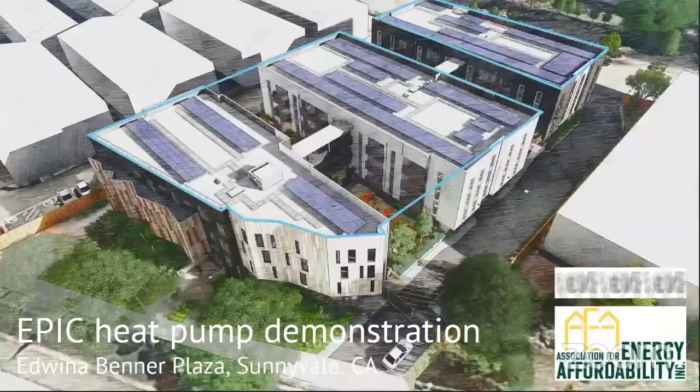This one is a central system. It has a recirculating loop, actually 2—one plant serving the first 2 bars here, and another second plant serving that last bar. So a central system like we typically see, but with Sanden heat pumps operating in series to feed large storage tanks.

We worked with Midpen Housing, who's the owner, and Nick Young at Association for Energy Affordability, who is our energy consultant on the project, and who also linked us into this EPIC project. That's been a really interesting process for us on our end.

Conceptually, the system is not particularly hard to understand, but our sector and industry is one that doesn't readily innovate. For instance, we're working with mechanical designers who, if they're unfamiliar with a system, it really sets off alarm bells for doing literally anything new out of the ordinary. Working with them, and then plumbing subs and sometimes the contractor, can be another obstacle.

This particular design went through a couple of iterations as we were going through design—that's just one function of being part of the pilot. But also going into operations, making sure the system is going online well and functioning properly is something the research team is really in charge of. Seeing that roll out and take place is interesting when we're also trying to use this project to look ahead and see how we can grow our advocacy to install similar systems and start pricing them out earlier on in projects.

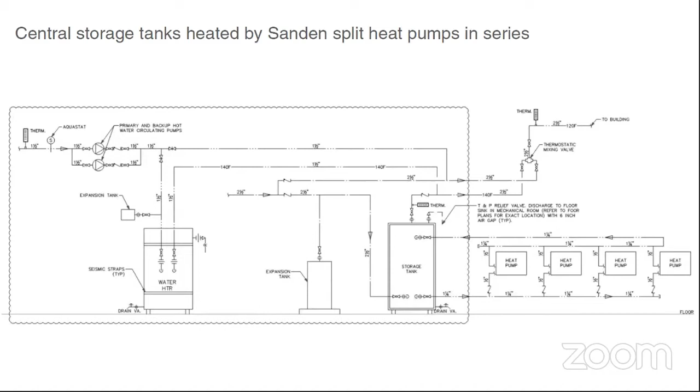And so, I wanted to highlight this next slide because obviously the grant money was pretty critical, I think, in making sure this design happened through design and construction phases. And it's something for us to keep in mind if we were to do this in the future. But also it's being driven by the research agenda.

And so when it comes to how this project lands with the owner, how it informs their perception of heat pump hot water systems, how they understand how it compares to the typical gas and solar thermal, we're kind of the ones stepping in to fill the gaps and talking to AEA. We had a debrief and decided as a team how we could develop some tools to help both us and the owner make sense of this system. So that was really interesting.

I think a big piece of that is a systems operations narrative and diagram that works for us, but also is a little bit more of an intentional handoff to the operating team on site. Because once the researchers pack up their bags in about a year and report on the results, this system is going to be in the hands of the owner, and we want them to feel good about that.

The other opportunity with this project that's really interesting is that we completed a very similar, almost identical project just a mile away with the exact same team, same consultant, same contractor, same owner. And so we're hoping to work with the owner to do a modest performance comparison there so that that can inform their design standards, hopefully. Next slide.

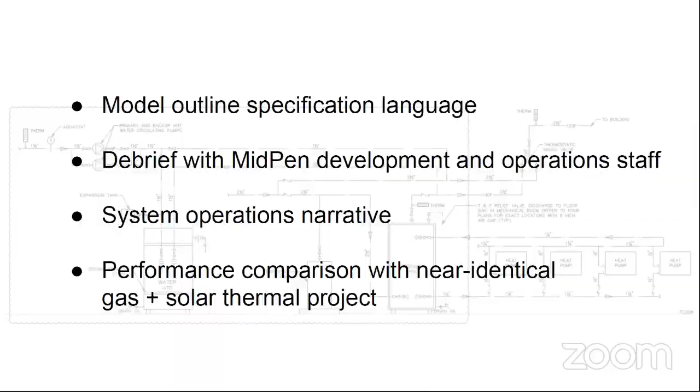So that was sort of our first experience with electrification. And now what I wanted to spend most of the time talking about was Coliseum Place, which is a project we're working on with Sean. It's in Oakland, California. Go to the next slide. It is 58 family apartments, very low income, the heart of East Oakland near the Oakland Coliseum. 20% designated for current homeless, formerly homeless, we refer to them, and 25% also people with mobility impairments.

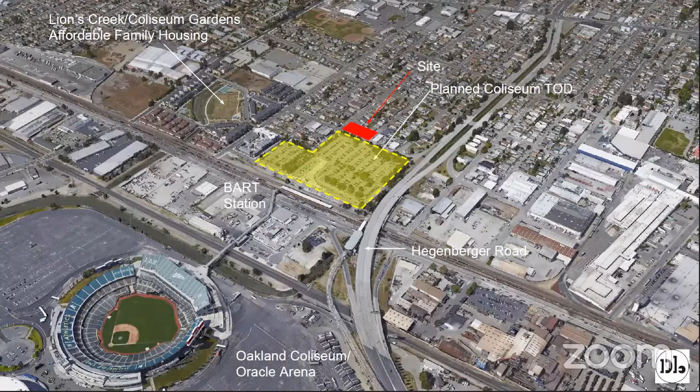So, next slide, you can see it in its context. Sorry, go to the next slide, thanks. So it's in this kind of neighborhood with a lot of need, both for affordable housing and for increased density. And as a result, the owner came to us, so sorry, let me explain a little bit. It's situated not in the planned transit-oriented development next to Oakland BART station, but just adjacent to it at a formerly industrial site, which itself is just adjacent to this neighborhood that's very low-rise, single-family working class homes. Next slide. I forget what the next slide is.

So the client came to us actually with this interest in doing something beyond LEED. They wanted to advocate for something better. This was like 4 years ago. Doing zero net energy for a building this scale still seemed really out of reach. And the International Living Future Institute was launching a pilot program to look at how the Living Building Challenge might apply to affordable housing projects like this. And so we jumped on board in that pilot program, and that opened the door to have a different conversation about this building than we would on another project.

So a couple of things about it, just in terms of the design, is it's a pretty simple mass, double-loaded corridor. It steps back from the single-family neighborhood to the northeast. And typically on our projects we usually like to create a welcoming entry and a nice green open stair. We call them a green stair. I don't actually know why. We like to put greenery in them, maybe.

Open circulation. In this particular project, we had an opportunity, just due to the site dimensions, to maintain that slot all the way through. And opposite the stair is laundry, so common area, really accessible and celebrated bike storage that hopefully actually gets used rather than sticking the bike rooms in the garage. It also links green space, common open space, and the ground floor common areas. So we see this as a central active core, a social environmental core.

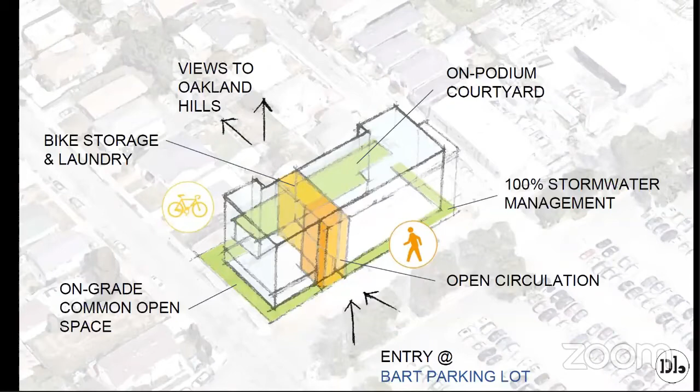From the site response diagram, it also has a challenging southwest primary orientation, which seems to be pretty typical for us. We always have this orientation. It's tough to deal with. So from early on, we conceived of an exterior sunscreen that was integrated with balconies that have since gotten removed, but the screen has survived. And we're doing this living building, so we're looking at this elevated PV canopy.

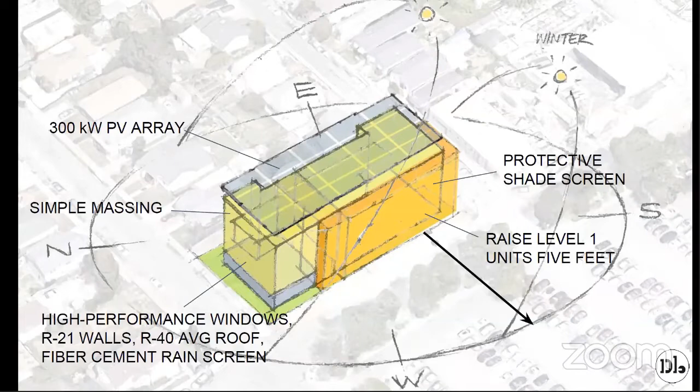In terms of the envelope, it's actually pretty standard. We're not bending over backwards to do anything. We are just on the better performance end of things. We are using vinyl windows, R21 walls, and then we do tapered rigid insulation, mineral wool insulation. The Rockwool roofing product is tapered to provide the sloping, so it provides a pretty high average R value. And then our typical fiber cement rain screen. Next slide.

So early on, I'm gonna check the time here. This was almost 4 years ago when this project kicked off, when they applied for funding in the first round and it was denied. But we were still a part of this LBC pilot project. So we did an early stage design energy model, with a little bit of a grant from Enterprise Foundation, to look at the feasibility of the energy petal, which is net positive, actually 105%, and the water petal. So this was kind of a side project.

Doing this kind of design energy modeling is not something we typically can afford. Title 24 compliance software has been the primary tool we use to make energy decisions, which is awful. Actually, I guess it's getting better now. Until recently it has been pretty inappropriate, and it's hard to justify using analysis tools outside of that, especially for affordable housing, or really anyone. No one sees a reason to optimize for operating energy or comfort or anything you might use a whole building benchmark model for. So this was a good opportunity to finally do that for one of our buildings.

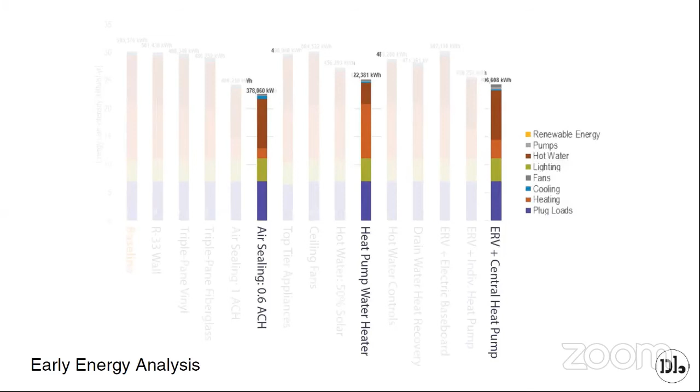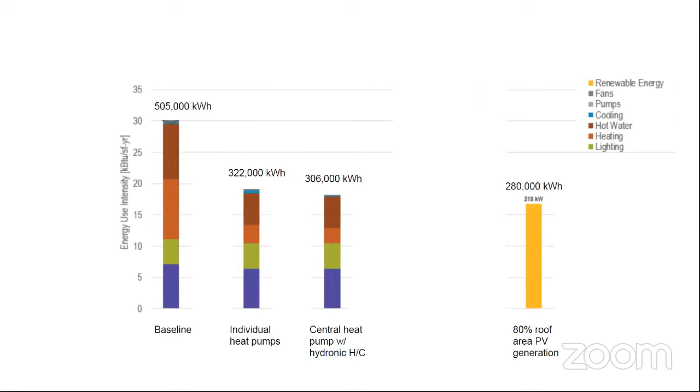That, what technologies for heating and cooling, probably isn't the biggest, didn't show the biggest difference. And that was clearly going to break the bank, so we didn't consider that. But this early analysis, this is just sort of how this analysis showed us going from a baseline building to one that almost got to the PV that the building could support. Next, please.

So when we actually kicked off this project for real, when it got its money, it got its feet under it this last fall, that analysis sort of started us with this base system, which is ductless mini splits in the apartments and individual HRVs in every apartment. And this is actually a pretty standard base system that we propose in our projects now.

We've started using HRVs more in place of bath fans. There is some cost recovery there, so you're sort of switching out one piece of equipment for another. And then mini splits do tend to be more economical versus a ducted split system. But it's still a lot of little bits of equipment, and probably the primary downside, other than installation costs and maintenance of tracking all these little pieces of equipment, is the maintenance schedule for filter replacements on the HRV. And this is a challenge, I guess.

I wanted to run through 3 different scenarios that we considered for this project after Sean and our MEP came on board, because I think it illustrates some of the unresolved issues in the continuing debate that we need to still be having about proper ventilation for these apartments. Next slide.

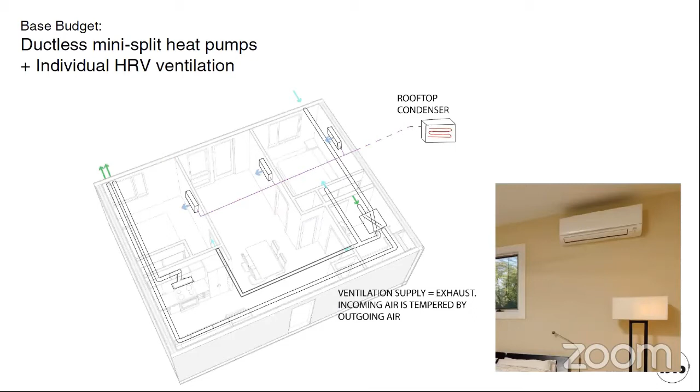So if we were to cut out some of that upfront equipment, labor, and maintenance cost, we might go to a simpler package system. In this case, a VTAC that also offered some ducted distribution, and infiltration to provide makeup air, because there is some research to show that the exterior wall acts as a decent filter, and there will be some that comes under the door to the corridor.

We know that is a big issue, just by looking back at projects and seeing concerns about odors and drafts coming under the front door. That's kind of the chief downside, is you don't know where the air is coming from. But otherwise, it's a very simple, legible, easy to understand, and probably decently performing way to go. Next.

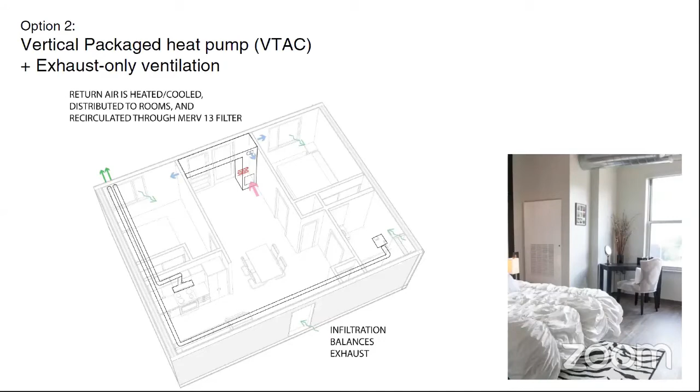We also considered a central approach to air delivery. Our mechanical engineer referred to this as sort of a hybrid approach, where you're not delivering minimum outside air, you're upsizing the ductwork a little bit so that a central heat pump does cover some of the heating loads, and the volume of air, even the cooling side, could be used for some sort of free cooling, kind of like an economizer idea for a multifamily building.

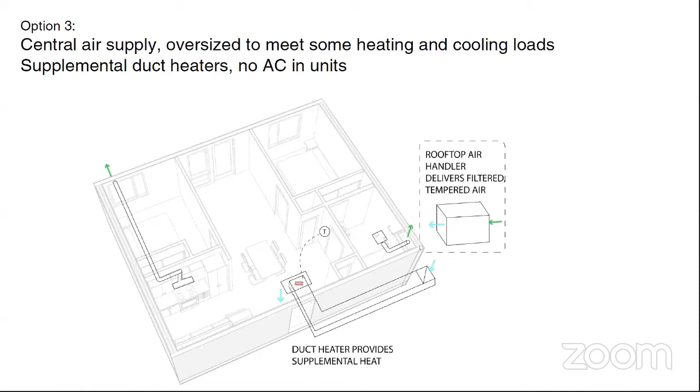But not with the complex zoning, right? So each apartment would have control over a duct heater and no air conditioning. Next slide. So between the time when we set out these three options, and I should say that last one, the whole idea was you would save on the cost of installing heating and cooling equipment in every unit, and no air conditioning in particular.

So, as a side note, that didn't end up being a controversy for this project. Oftentimes we have a really hard time advocating for air conditioning. But in this case, we didn't. Everyone was in agreement that heat waves are real and we need to provide air conditioning in Oakland. But it's just interesting to highlight that that really is not typically the case.

So as I was saying, between the time when we selected those systems for comparison and the time we actually sat down and decided, this happened. The Camp Fire sent us elevated levels of particulates, very hazardous air. I don't think it dipped below an index of 180 for the entire 11 days. We have a particulate counter in my house, so I was tracking it and refreshing PurpleAir 5 times a day.

It really changed my thinking, and I think the thinking of folks on the client's team too. I was considering my 1-year-old and all the other 1-year-olds with their families told to stay indoors, and knowing that indoors is not that much better than outdoors when you have that level of hazard. Next.

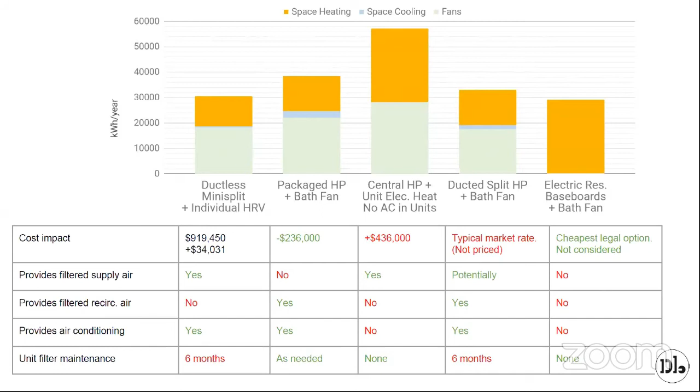Moving right along. So we ended up leaning more towards this. The package unit started looking pretty good, with the only downside being that it doesn't provide filtered supply air. Next. And so with the VTAC, actually, it takes up like 9 square feet of an already very small living room. And so we're actually moving forward with a smaller PTAC.

So, you know, there are definitely downsides to all of the options, but in this case, we're really focusing on the theory, the hypothesis, right, that if you're focusing on simple legible systems, cost, affordability, and maintenance, then energy, your goals start to align. Next.

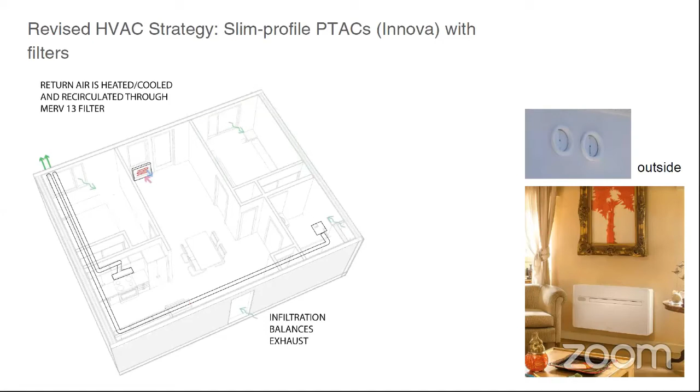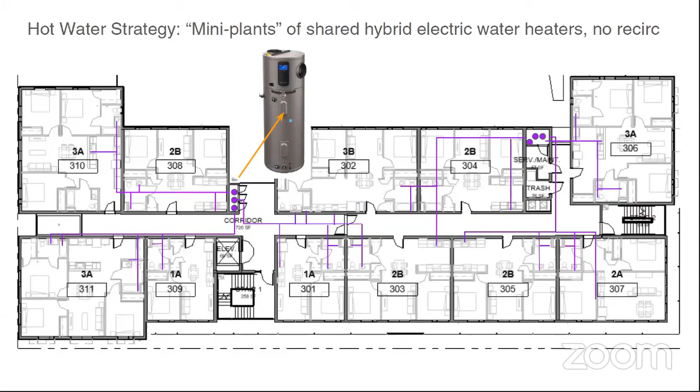And we're pursuing a similar kind of hypothesis with hot water. And this is pretty interesting. This will be the first time we don't do a recirculating system in probably 25 years. The last building, at least I know of, had individual tank type water heaters in each apartment. In this case, Sean at RCD is working on a project that also does this model of sharing these single family style water heaters. In this case, we're trying to bank them into mini plants that serve groups of units across the building. Next. And the thought is that they're probably lowest cost and highest efficiency at the same time.

Yes, yeah. And it's supposed to be a zero net energy building, so they're pursuing the most efficient and cost-effective strategy, hopefully. Sorry, that's just my editorial. No, please, yeah. And we were kind of like, oh, where are they going to go? And then we got excited about showcasing them even in this central slot that I was talking about earlier. Next.

So we've been going through a process with our plumbing designer of seeing how this would work. A first take, a trunk and branch serving from each water heater to the units it's serving, generated a 2-minute wait time at the furthest lavatory because the upstream branches needed to upsize pretty dramatically. Next.

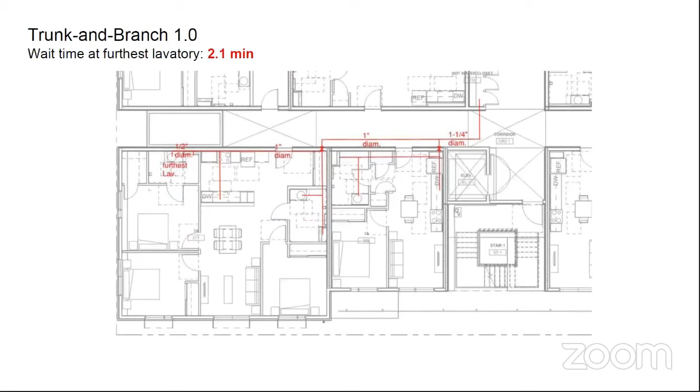And so we're still in the shredding phase. So we're working with Sean and our plumbing designer to pursue different options. One is maybe grouping fixtures more and working more with a manifold to downsize those upstream pipes, which has already gotten us down to 1 minute. And then our plumbing designer on this project, bless her, is actually pretty open to doing more detailed pipe sizing calculations to get those pipe sizes down even more. Next.

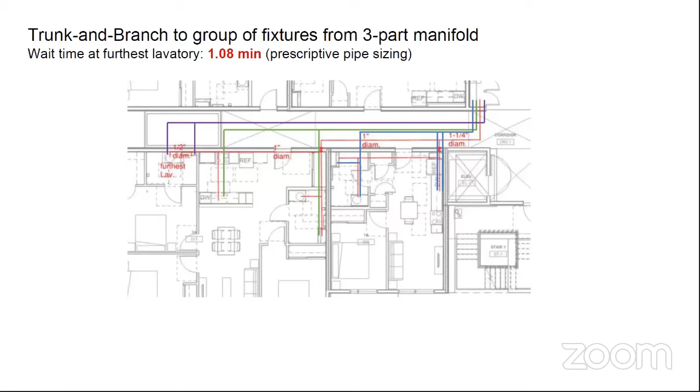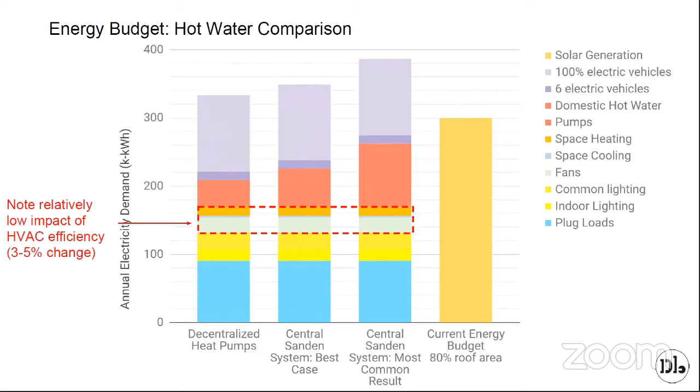And just to kind of highlight, you could see, even though we didn't choose the most efficient HVAC system, it doesn't amount to more than like a 3 to 5% change in the overall total. Next.

In terms of those design decisions that we made, they're kind of highlighted in yellow here, and they are represented by quite a significant savings if you also include deleting gas service to the building, which in this case, honestly, we haven't seen that much money from doing this on this and the Edwina Benner project, but it is something.

And then in addition to that, a 2015 utility allowance calculation suggested that we might recover over $500,000 from the owner being able to claim zero energy bills from their residents. So that's actually pretty amazing when you compare those sums of money to the big investments that this project would be making to go to zero, which is namely the exuberant PV structure on the roof. Next slide.

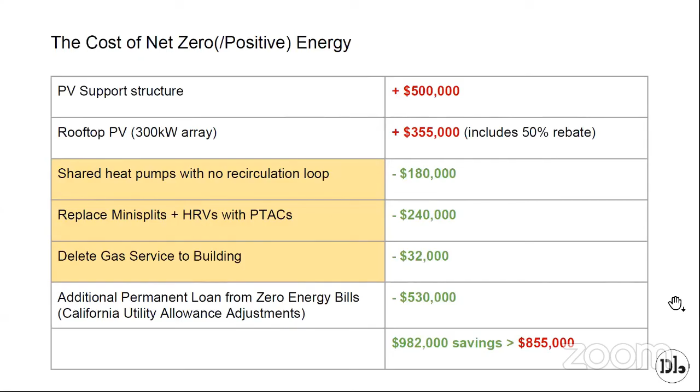And just in the last minute or two, this is a talk about zero carbon, and even though the hot water and not doing on-site combustion is a huge part of that, I've been really fascinated to see an order of magnitude how some of these efficiency measures are stacking up against some measures that you can apply in embodied carbon, the material side.

And again, we have an amazing team here. We have a very eager and supportive structural engineer as well as plumbing. In this case, he is looking at different options for reducing carbon and has determined that doing cement replacement in high percentages for the mat slab, which is easier to accommodate than other parts of the structure, can represent a significant reduction in global warming potential.

And if you look out 10 years, which is sort of like our pencils down moment, you can start to see that this is napkin math. I mean, I did my best here. I'm sure it requires a little bit more scrutiny, but you can see the order of magnitude of that reduction of just doing more cement replacement in just that concrete podium, how that compares to the savings measures that we were able to achieve on the efficiency side, namely the recirc. So that's just sort of food for thought.

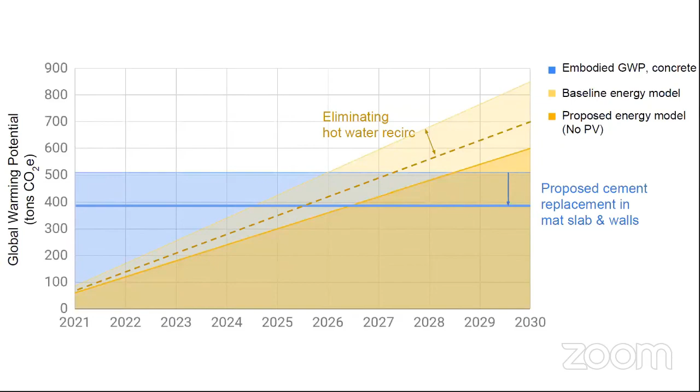And next, moving forward, we're kind of interested in it. It really demonstrates more of an approach than a solution, that with simple tools and intuitive ways of thinking about it, as long as you stay focused on the possibility of those opportunities. Maybe the steel structure is not doing us any favors; maybe we could still roof mount a lot of the PV, eliminate all the embodied carbon caught up in the steel structure as well, cut cost. And again, the theory is that all of these things can start to align if you sort of think about it.

Now with that, Katie. Yeah, that's it. That's the last one. Thank you. Yay, Katie! Yay, thanks.

Brilliant. Now, we should transition to Martha Brooke. One last thought to add is your emphasis here on all the different ways we could save energy. I think you showed a graph showing that we have only 80% of the roof filled, even though it's 6 stories tall, and then we have space for electric cars on this 6-story tall building. In just a half an hour, we're going to have a wall-mounted PV presentation and all sorts of different interesting applications of PV that can help us go even higher.